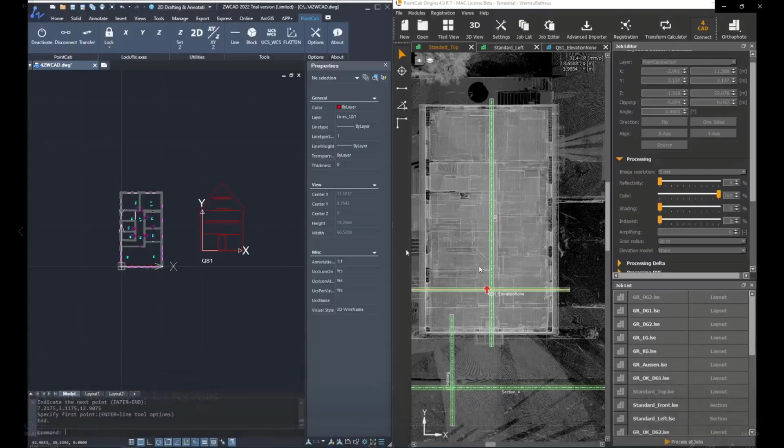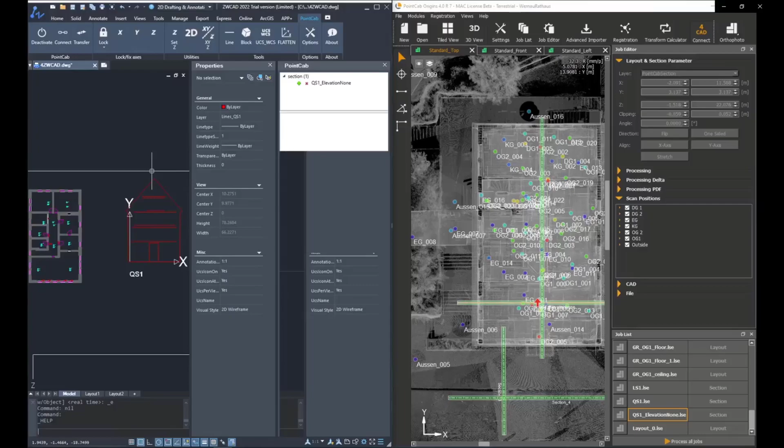We are going to create a section in origins. For that section, the elevation model has been set to off, so there's no elevation model, meaning there's no depth information anymore in the section. Then we're going to insert that to have it as a reference in ZWCAD, and you're going to see it now from the side, so to say, from the front view.

And now we can start creating lines, but this time we are not going to choose the user coordinate system anymore. We are going to work in the world coordinate system. As usual, create lines by clicking on 2 points. And at the end we created the outer lines of the section.

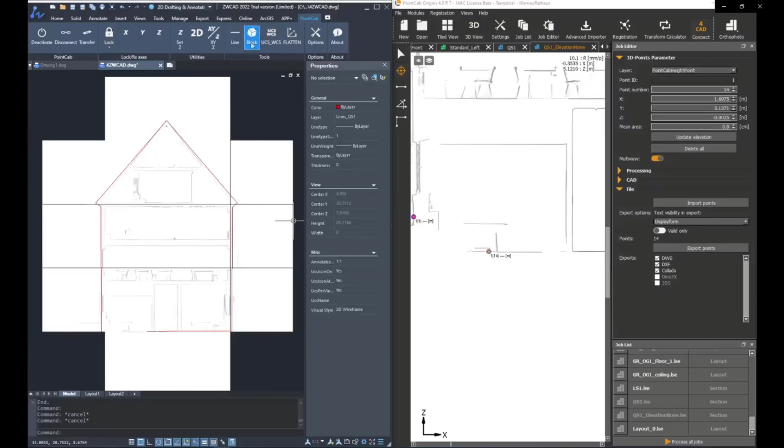Now if we are going to have a look at it from the top view, of course we can also create multiple lines. However, in this case, when working on sections in world coordinate systems, in our world coordinate system, then the polyline option cannot be used anymore, since polylines can only be drawn in 2D.

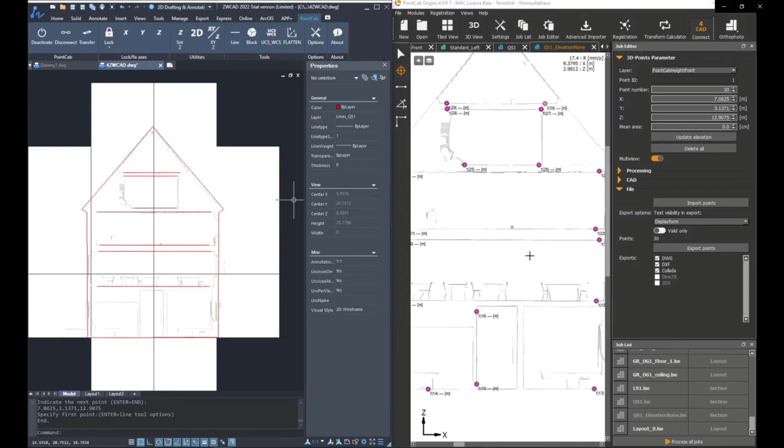But polylines can be used when working in the user coordinate system, and then we are in top view. So now if we are still in the world coordinate system and we're going to switch the view to the top view, you can see that the section created now is in the correct 3D position that it should be.

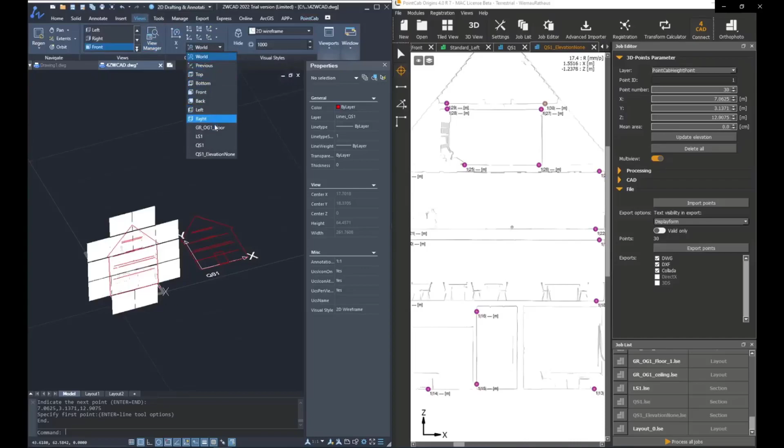So it's perpendicular on the layout created. So if we're going to look at the front, or if you're going to look from the top, you'll see that now the section is exactly in the place that it should be.